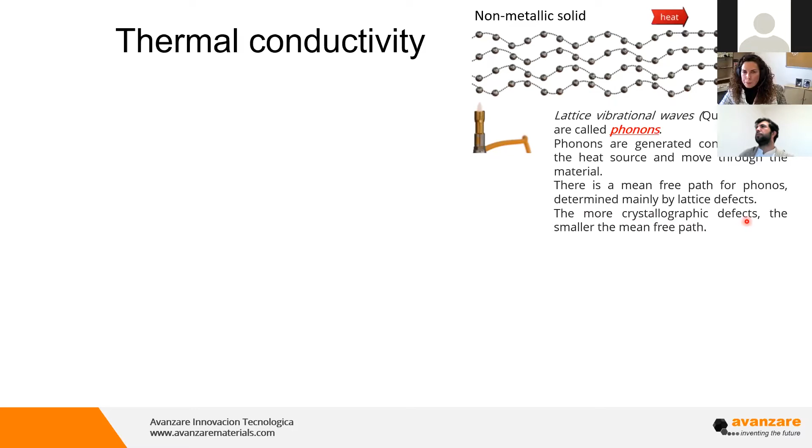When we put graphene in a material, we assume that graphene is conductive. Indeed, the intrinsic thermal conductivity of graphene is about 2000 watts per meter Kelvin, while the polymer matrix usually is about 0.2 watts per meter Kelvin, so the difference is about 10,000 times. So when we put the graphene layers in a matrix, we need to ensure contact between these layers to ensure that phonons move.

When we put these layers in the matrix, we can be in three situations. In this first situation, there is not enough graphene layers to have contact between them and let the electrons or the phonons move.

So there is no electrical or thermal conductivity. In the medium situation, we are in what is usually called the percolation threshold, where electrons can move from one layer to another because of the tunneling effect, in cases where there is not perfect contact between the layers.

So we have electrical, but not thermal or not so much thermal conductivity. In the third case, we have very good contact between the layers of graphene, so the phonons can move easily, and we have both electrical and thermal conductivity. Please keep this feature in mind, because when we talk about increasing thermal conductivity in a composite thanks to graphene incorporation, we will be in this situation.

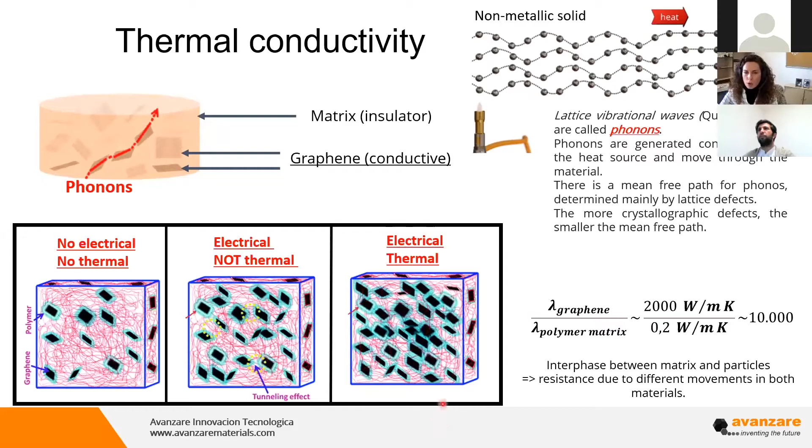Once we understand a bit about how graphene is acting in a composite, I want to explain the family of methods to measure thermal conductivity. There are two big families: steady state techniques and non-steady state techniques.

The non-steady state technique, as the name says, measures thermal conductivity not at equilibrium but during the heating process. This is a quick way to measure thermal conductivity, but there are some effects when the filler has higher conductivity than the matrix, like in the case of graphene, where particle thermal shunting can occur, and it can be a source of error because it translates into an overestimation of the thermal conductivity. Steady state techniques usually record thermal conductivity during equilibrium.

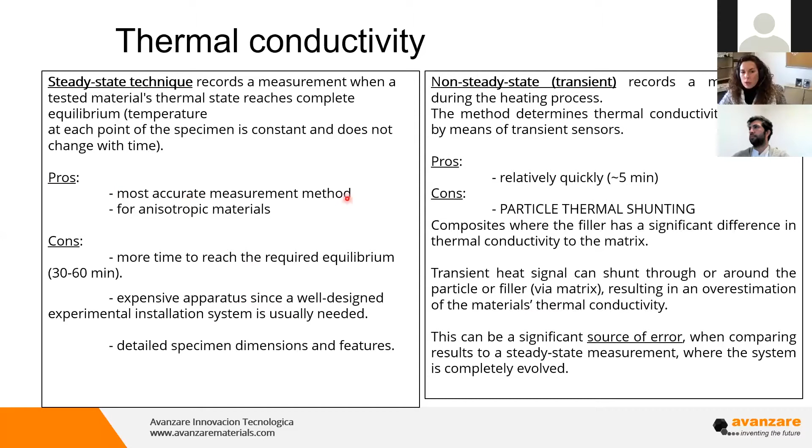For example, a laser, which in most cases is the most used source of energy, makes a pulse, a heat, about one millisecond, to the specimen we can measure, and the temperature is recorded at the back. This is usually the technique used for transient methods. However, today I'm focused on steady state methods because it's most recommended for this kind of material, as I said.

This is the one we have at Avanzare, and I'm showing you in a video how we technically do the measurement. This is with a cooling unit system to keep this plate at cold temperature, about 5 Celsius degrees, while this upper plate is heated at about 45 degrees. Inside we have some thermocouples to determine the voltage and, with that, the temperature.

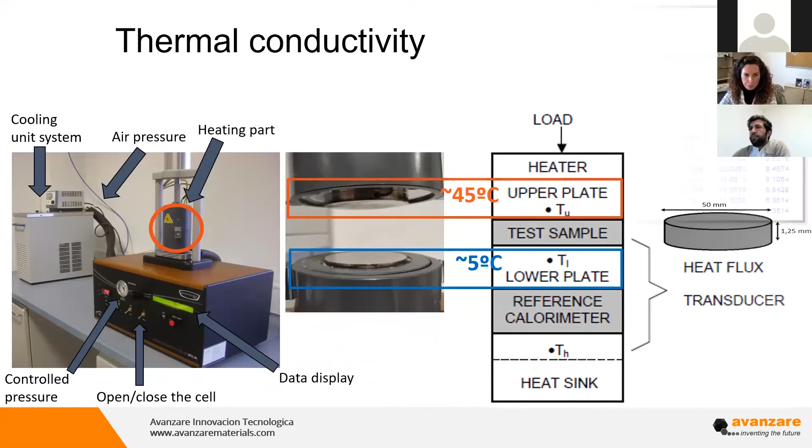So how does this apparatus work? It works with standards made of stainless steel and Vespel, which is a plastic polymer with perfectly known thermal conductivity. With different thickness standards, we can build this calibration curve. We insert our sample results into this calibration curve to determine the resistance, and knowing the thickness, the thermal conductivity.

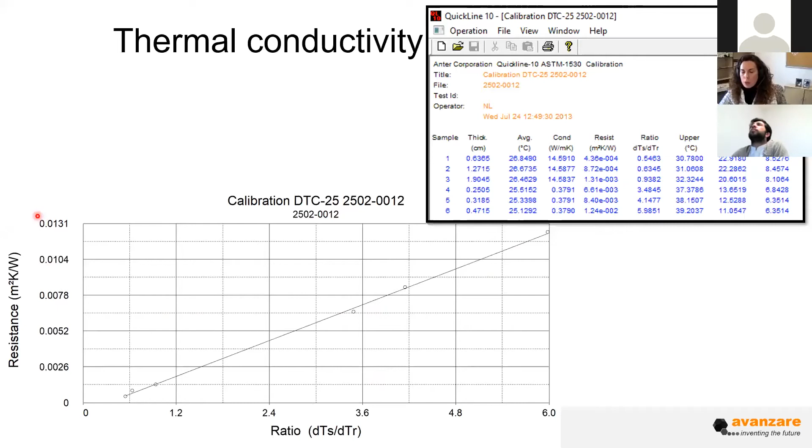The kind of specimens required to determine thermal conductivity by this method is based on standard ASTM E1530. We use this kind of specimen, which has flat and parallel faces of 5 centimeters diameter, and we can provide our customers, if needed, with molds to inject the samples.

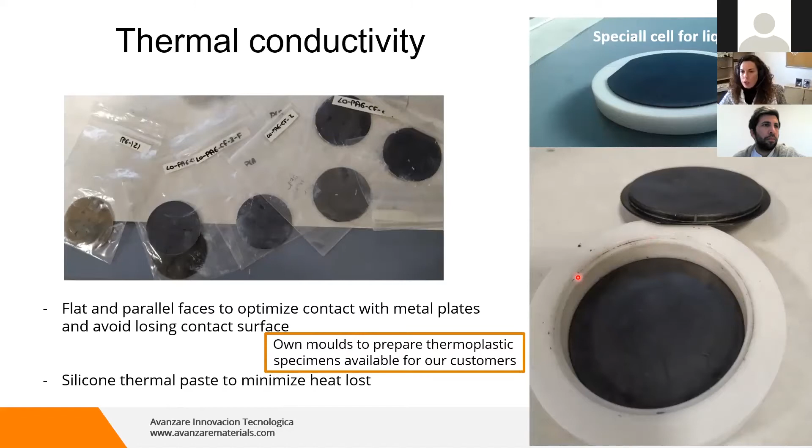In case we are working with fluids, we have this special cell with the same dimensions. We fill the sample here and put it inside. This is the video of how we are measuring.

This is a specimen with flat and parallel faces. We are applying this special silicone paste of high thermal conductivity. It's necessary to apply it directly with your fingers to create this regular surface, as you are going to see now, to avoid any loss of heat from the sample to the upper and lower plate.

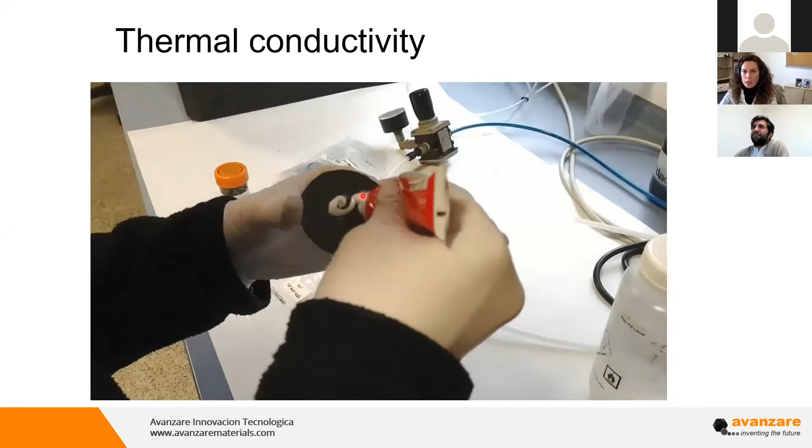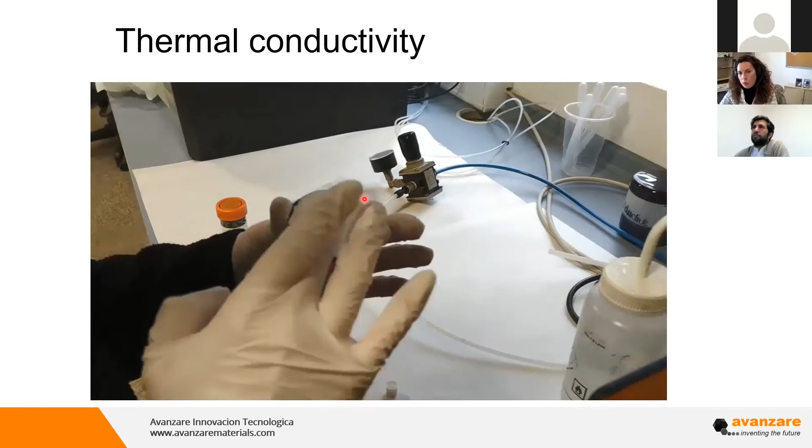So we put this silicone paste on both sides of the sample and insert it into the cell. Once inserted, the cell is perfectly closed to avoid any loss of heat, and after 20-30 minutes it reaches equilibrium, and the voltage and thus the temperature of the upper and lower plate are recorded, as you see here.

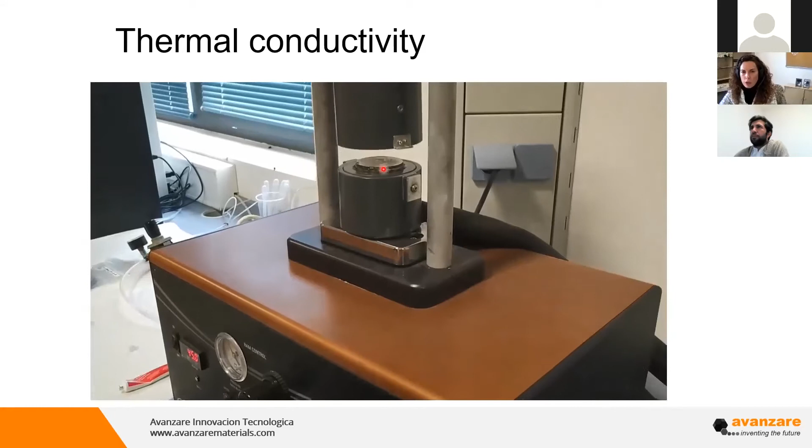So now it's placed. Remember that this is the hot plate, the bottom is the cold plate. We close with some pressure and it's perfectly closed.

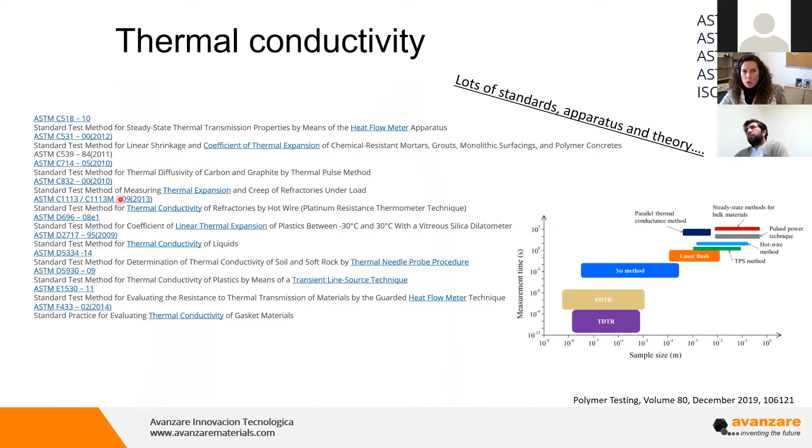Just to finish this section, it's important to understand that there are a lot of standards, a lot of apparatus, a lot of theory, and different comparisons, with some papers discussing differences in the thermal conductivity recorded for the same sample by different methods. So for comparative results, it's necessary that the method be the same, and to take into account some overestimation in the case of transient methods.

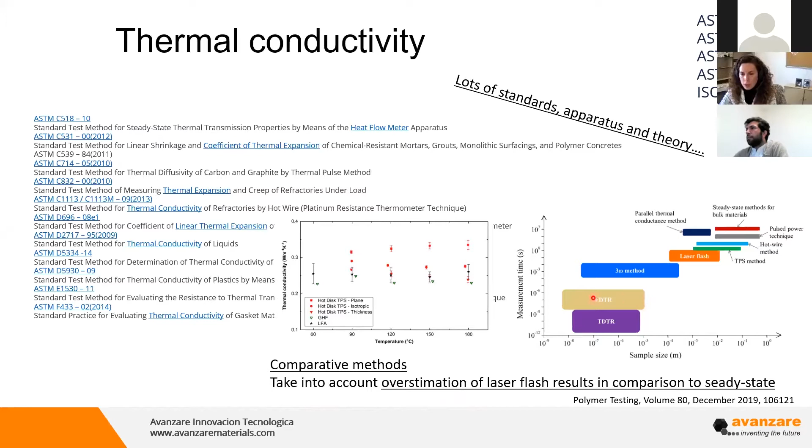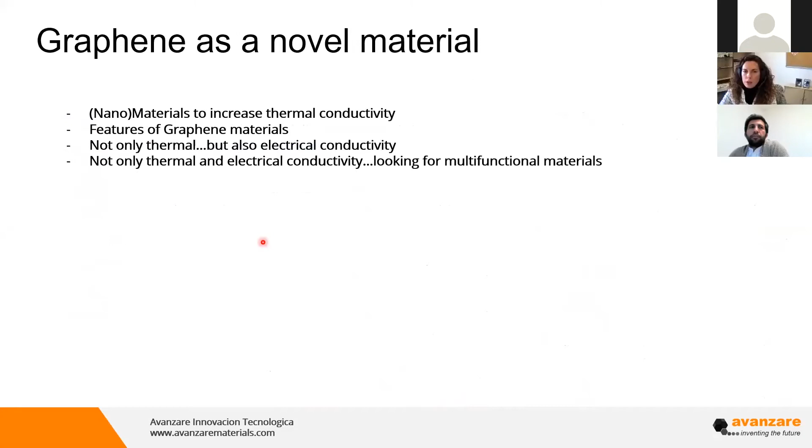So to know how to proceed, I'm talking about what graphene can do for this increase of thermal conductivity. I'm going to explain some features that are important to take into account when we are selecting a material for this. If we compare the intrinsic thermal conductivity of carbon family nanoparticles to others, for example metallic or ceramic, we see that the carbon ones are higher than the others.

But not only this - for example, it's typically assumed and published in different papers that to reach thermal conductivity values of about 1 watt per meter Kelvin with some loads, boron nitride, which is the most efficient ceramic, needs about 50 to 80 volume percent. So it's a high quantity of load.

In case of graphene, not only can we reduce this quantity, but I also want to remark the difference. For example, if we compare graphene density, about 2 grams per milliliter, with metallic nanoparticles, we're talking about 2, 3, even 5 or more times higher. This means that the density of metals makes it so that for the same percentage by weight, the molar fraction is much lower in the case of metallic particles.

This can be graphically observed. If you remember, this is the situation we need to obtain to have thermal conductivity. The graphene is dispersing and occupying much more than metal nanoparticles because of this.

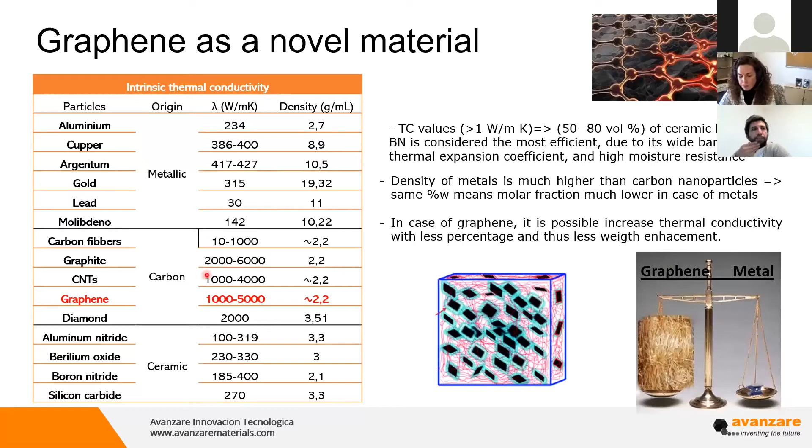So once we've seen this, if we go to modeling and some theory, if we could orient all our layers of graphene in a parallel way to the heat flow, this could be really efficient and the movement of heat should be very high. The thermal conductivity should be very high.

In the other case, if we put it in the other direction, the efficiency in moving the heat is going to be extremely low. What happens in reality is the distribution of nanoparticles inside the matrix is random, and it's needed to go to complex models. Also the results are usually in the middle, both for experimental and for simulation.

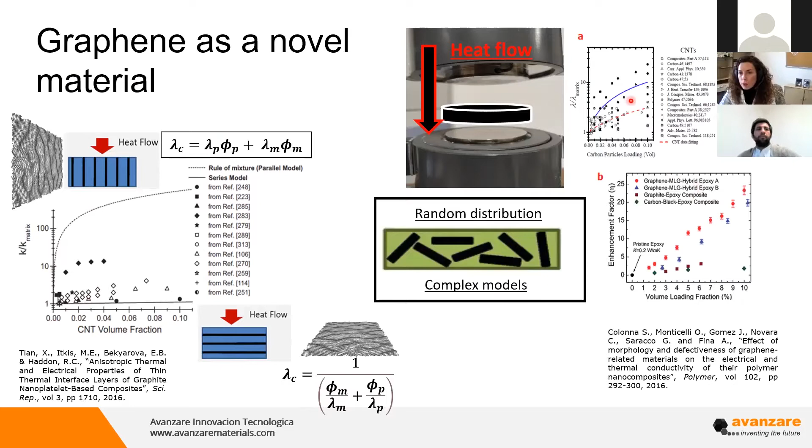I'm going to explain three features of graphene which are really important: the defects in the structures, the lateral size, and the thickness.

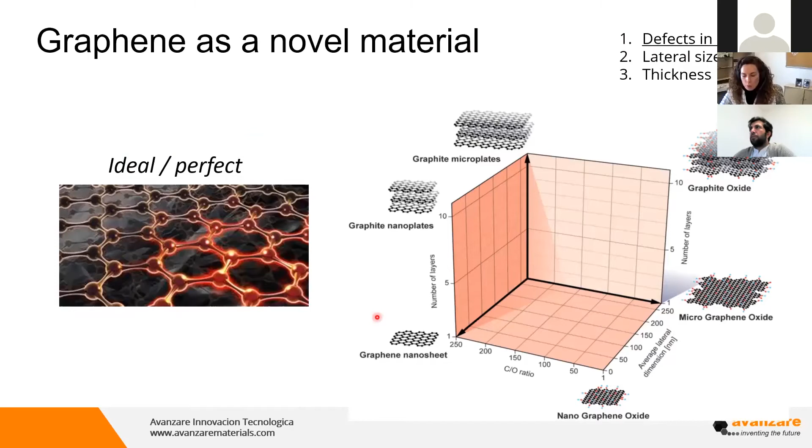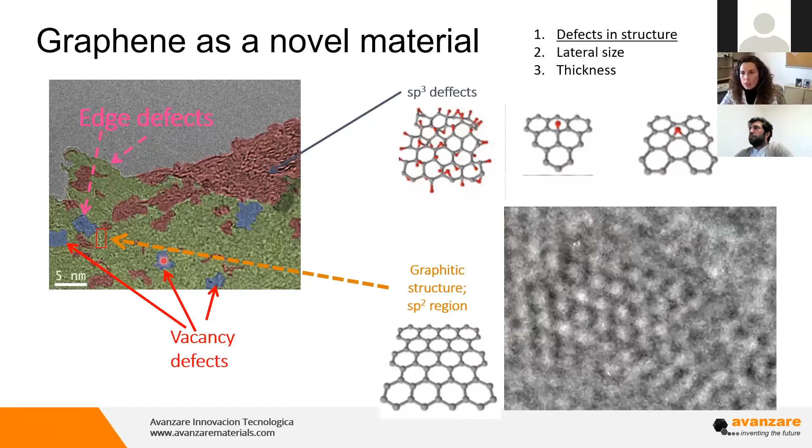Also, we find the end of the layer - so this is edge defect positions. And also there are areas where there are no carbon atoms, these are vacancy defects. So independent of the way, all these defects are affecting the movement of electrons and phonons, and for that decreasing the thermal conductivity - also the electrical, but in this case we are focusing on thermal.

What we do to analyze the quantity of defects of a material is acquire Raman spectroscopy, Raman spectra. Here is myself together with my colleague Boyan, working on the characterization of some graphene. For example, you can see here in the spectra two typical bands associated with the defect positions.

This is called the D band, and the higher the intensity, the more quantity of defects. I need to say there is a lot of theory about this technique, but to have a first approach to this - the more intensity this band has, the more quantity of defects.

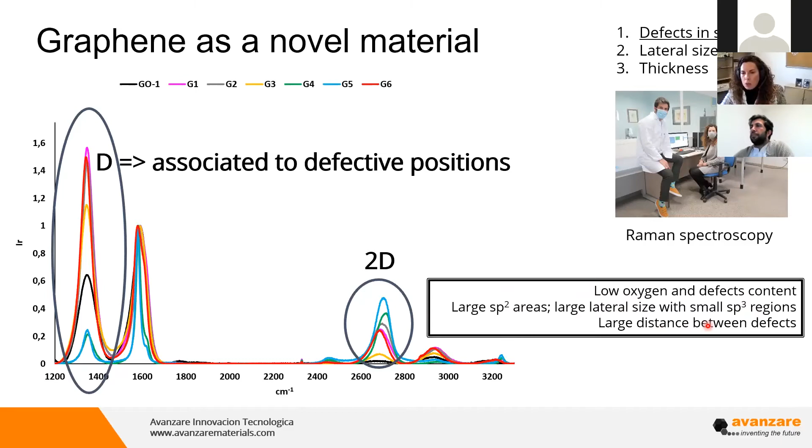Also, the 2D band is important to analyze the quantity and quality of the graphene. But in summary, we need to have graphene with low oxygen, because oxygen is the main defect present linked with carbon. So we need low oxygen and defect content. We need to have as large as possible sp2 areas with small sp3 domains, and a large distance between the defects, to let the electrons and phonons move easily in these high sp2 hybridization parts.

The second feature that I need to highlight is the lateral size of the material - this applies both in modeling and experimental work.

For example, if we compare 10 microns lateral size to 100 microns lateral size in the same kind of material, the difference is 2, even 3 times higher, because with higher lateral size it's easier for phonons to move. In experimental results, we observe that a small platelet of about 2 microns in lateral size barely increases thermal conductivity, while a platelet with about 40 microns in lateral size, as we increase the percentage of weight of this nanoparticle, the thermal conductivity increases significantly, up to 3 watts per meter Kelvin.

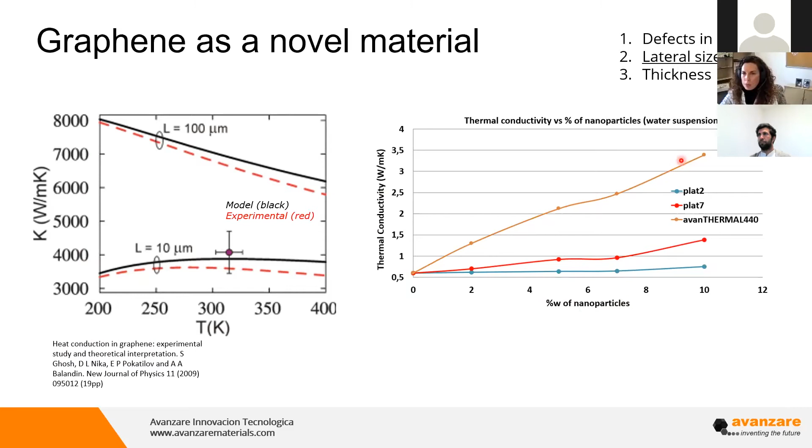Another example to analyze this is a recent paper on natural rubber working with different carbon blacks. We can observe the morphology of the aggregates of these carbon blacks and the thermal conductivity of these samples according to the percentage of volume of the load. If we compare these results with some obtained in natural rubber with materials from Avanzare, we observe a significant increase with a lower quantity of this material.

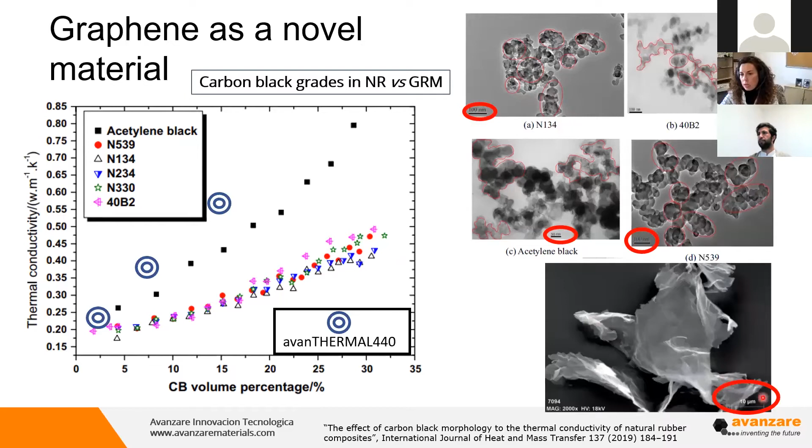Why can we explain this? We can explain this because this kind of material is about 40 microns in lateral size, while this one is less than 50 nanometers, and even the aggregates have a smaller lateral size. So this is like comparing a meter to a kilometer, it's the same range difference from nanometer to micrometer.

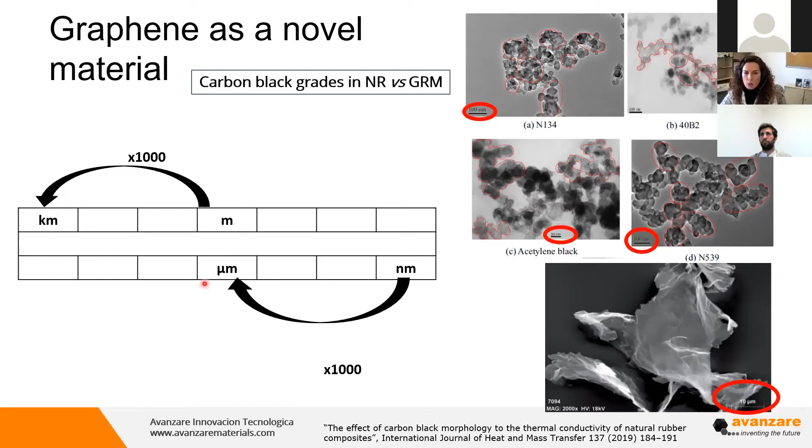The third important aspect to take into account is the thickness of the material. If we take into account that graphite is also a good candidate to increase thermal conductivity, because it also has an intrinsic high value of thermal conductivity, we need to understand that graphite is composed of millions of layers of graphene. So, of course, the contribution in the XY plane is high, about 2000, the same, but there also exists an important contribution in the Z axis, which is about 6 watts per meter Kelvin.

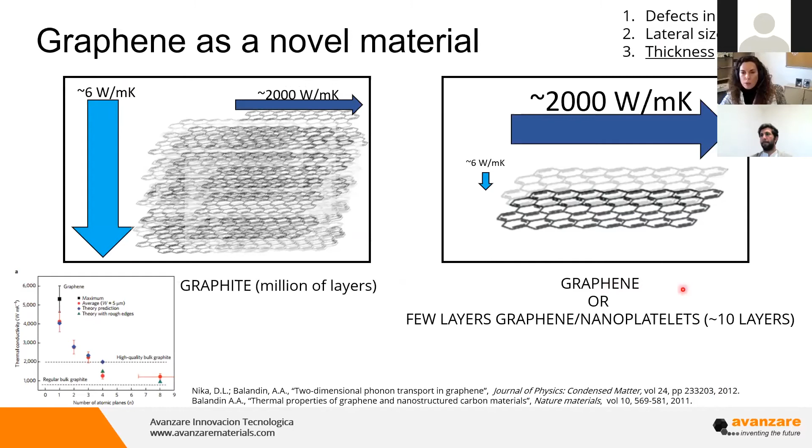So in the case of graphene, this is reduced. Especially if we compare with graphene, the contribution in the XY plane is much higher than in the Z axis. Besides, in the case of graphene, there is a greater number of particles because it's an exfoliated material in comparison to graphite. So once we understand these three main features, we are going to see some effects.

Apart from thermal conductivity, I'm going to explain that electrical conductivity, as you've surely read and observed in some results, is increasing a lot. For example, in a PEEK matrix, we are achieving 1 Siemens per meter in these composites, while the thermal conductivity is more than 0.5 watts per meter Kelvin. This is due to the tunneling effect and the movement of electrons along the matrix.

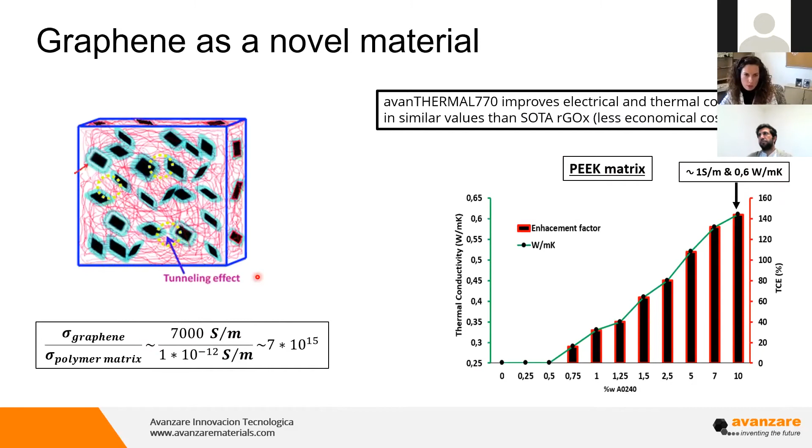What happens when we want thermal conductive composites but not electrical conductors, electrical insulators instead? In this case, what we are doing is achieving it by mixing our graphene nanomaterials with ceramic ones. As you've seen before, ceramic materials also have high thermal conductivity and at the same time are electrical insulators. For example, boron nitride is about 10 to minus 8 Siemens per meter. So what we can do is allow phonons to move, but put these nanoparticles, in this case the ceramic nanoparticles, in the middle to prevent electrons from moving and having high electrical conductivity.

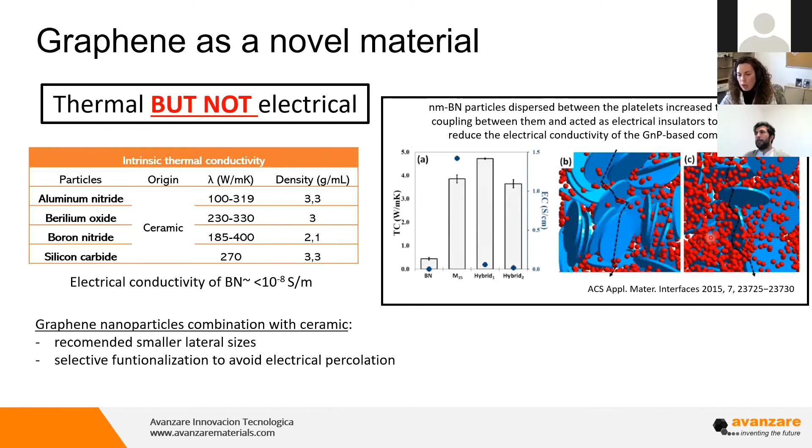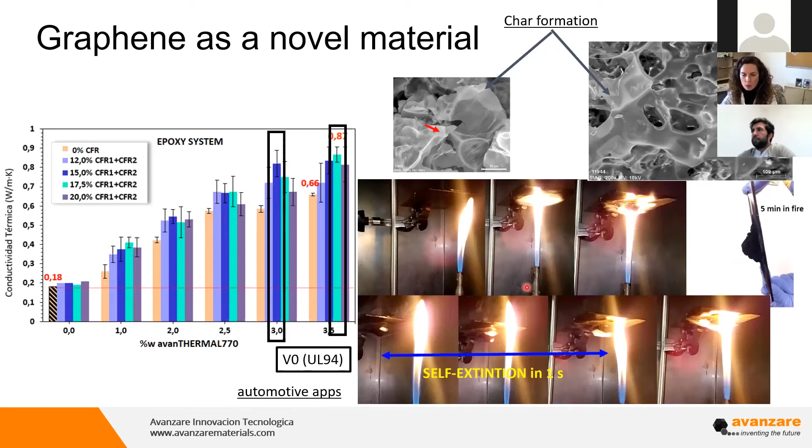Now we are going to explain a bit about how to produce these high thermal conductivity samples and some real applications that can be obtained, which are being prepared in different materials, such as thermoplastic, thermoset, rubber, or fluids.

When we need to prepare these high thermal conductivity samples, we need to remember that if we have chosen a large lateral size graphene material, one thing we should not do when processing with our polymer or matrix is break the lateral size. Because, for example, if we put this in a dispersion mediated by balls, the high impact will break, damage this plane and cut it. So what we have at the end is not this initial dimension, but a smaller one. So the percolation will require a much higher dose than expected. It's necessary to avoid breaking the lateral dimension.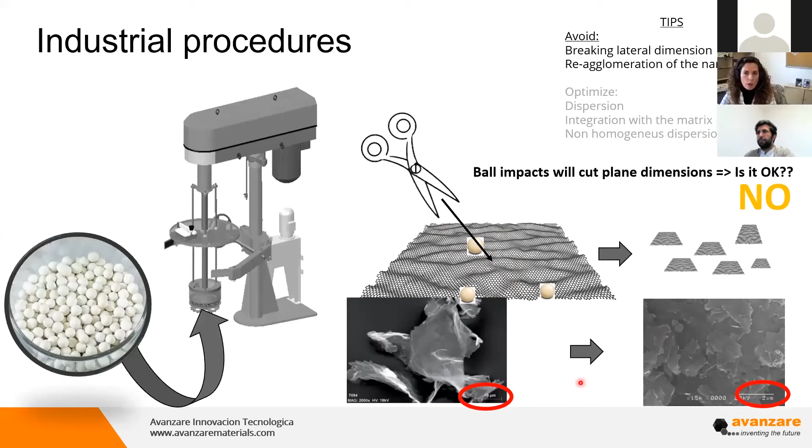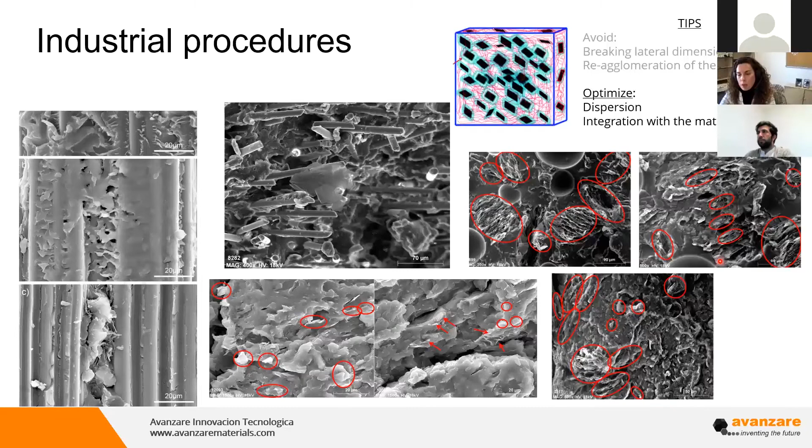It's also necessary to avoid reagglomeration. For example, in these same micrographs we can observe that in the matrix some parts are filled with reagglomerated graphene, but others are empty. So if we want a homogeneous material, this surely would not be a good idea. Another aspect to consider is having a good interface with the matrix, because the better the interface, the lower the resistance due to it. So dispersion and integration with the matrix are really important to take into account.

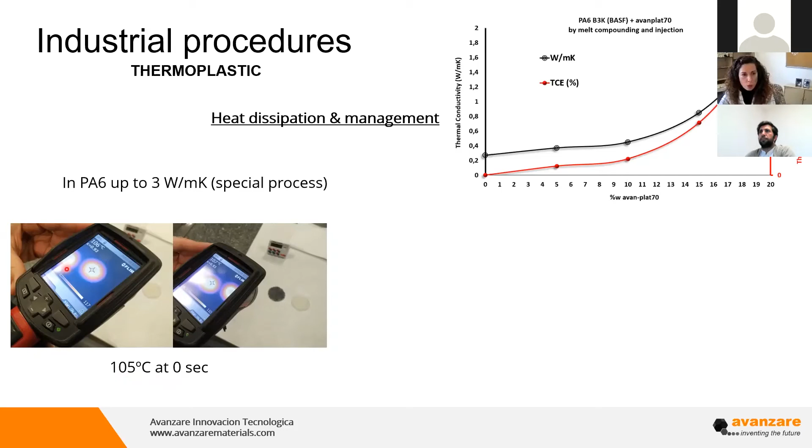Some applications we can observe in different areas: for example, this is thermoplastic. What we see in the image is two materials, neat polyamide 6 and polyamide 6 with graphene. To see graphically how this works for heat dissipation and management, we heat both at the same temperature. At the initial time, it's up to 100 Celsius degrees. We record the temperature with an infrared camera, and after 2 minutes, the neat polyamide remains at about 60 Celsius degrees, while the one reinforced with graphene is 20 Celsius degrees below.

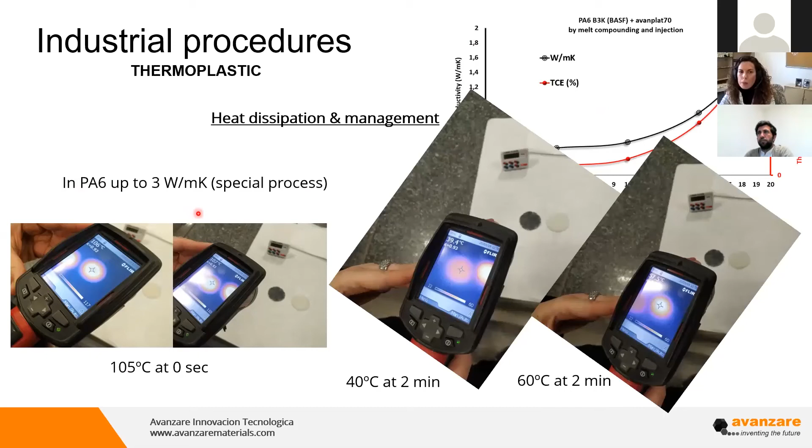This kind of application is useful for accelerated cooling processes of materials. This is because the thermal conductivity of polyamide is near 0.2 watts per meter Kelvin, and when we add these graphene materials, in some cases, depending on the process and the kind of polyamide, we go up to 3 watts per meter Kelvin.

So what we can do with these kinds of materials is prepare polymer heat exchangers, as for example these pipes, cooling hoses, and radiator tanks. The heat exchanged with the fluid is greater and happens in a quicker way.

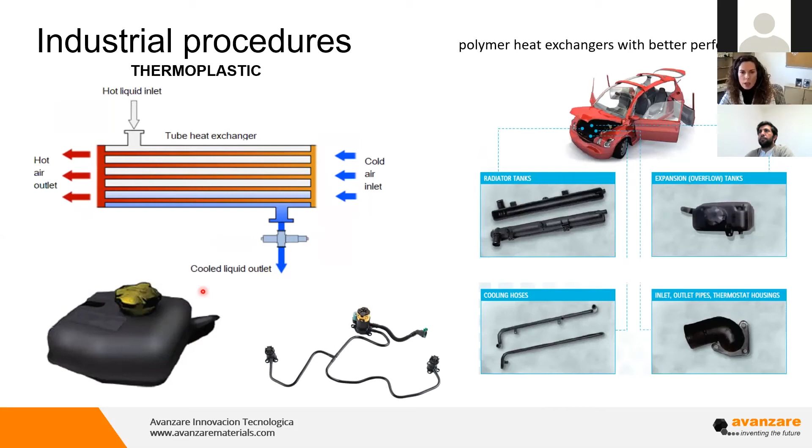What we do in these cases, if the customer needs it, is prepare a master batch with a high quantity of our material. This master batch can reach 3 or 4 watts per meter Kelvin, depending on the processing and the starting polymer, and of course with high electrical conductivity.

We can provide this master batch because in some applications such high thermal conductivity is not required, but one or more watts per meter Kelvin can be enough. So the user can employ this master batch in their process to prepare a final material.

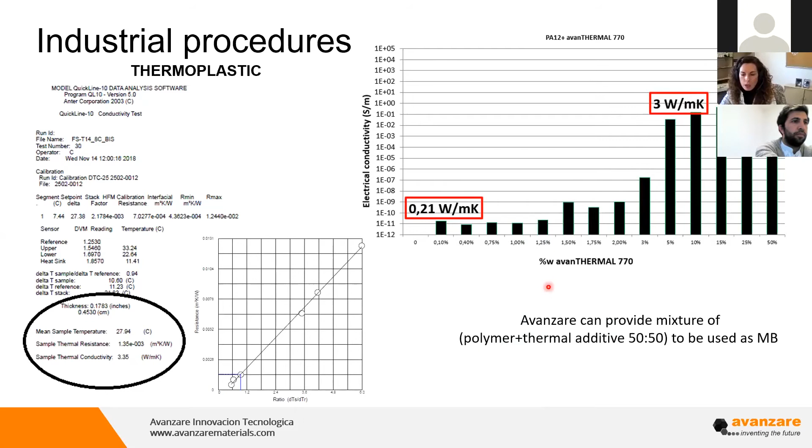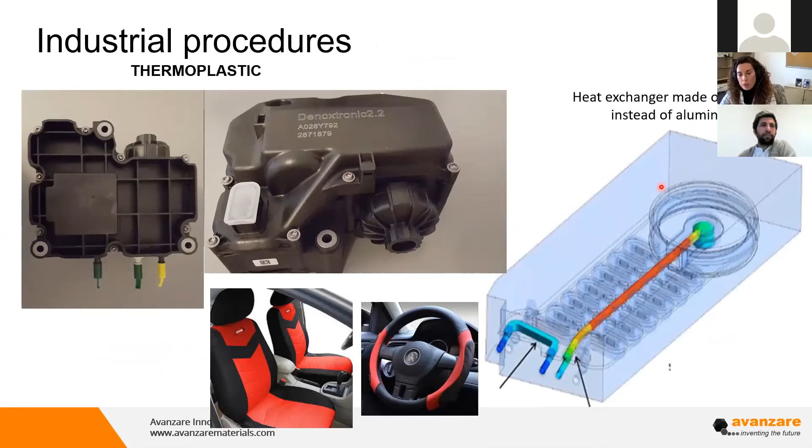In the case of thermoset, we've seen before the V0 behavior of the polymer with glass fiber, fire retardants, and graphene materials, with these self-extinction features valid not only for automotive but also for building applications, for example to manage heat in houses, passive houses, and similar buildings.

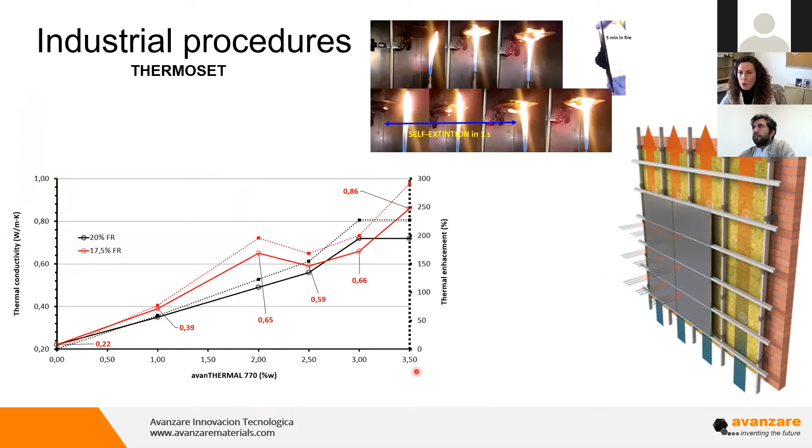In the case of rubber, we've seen before the increase in thermal conductivity. These applications are especially for silent blocks used as anti-vibrational components in cars and the automotive industry, in different parts of the car, where what we do is increase heat dissipation.

These components usually work at higher frequencies, so they undergo important fatigue and accumulate a lot of heat. If we reduce the working temperature of these materials, we reduce the fatigue and increase their life. It's important to highlight the results we can observe here.

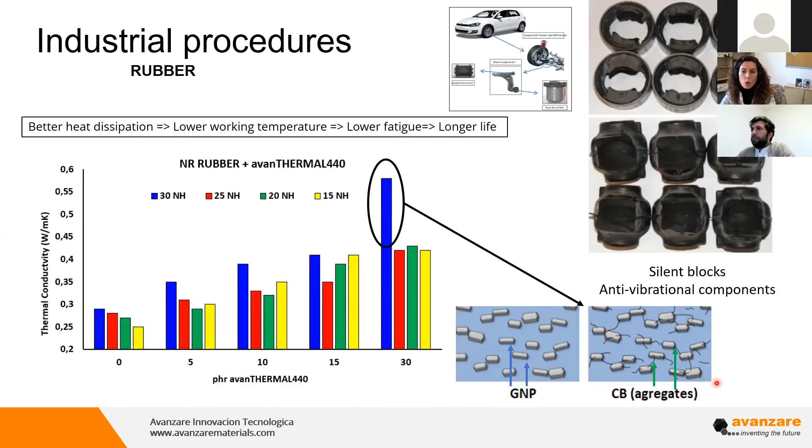This is the industrial formulation with different quantities of carbon black and different phr of our avanTHERMAL440 conductive additive. In this case, it's important to highlight what happens when we significantly increase thermal conductivity: we are creating a very cohesive network with graphene nanoplatelets and the aggregates of carbon black. So it's really efficient at moving heat from one part to another.

Apart from solids, thermoplastic resins, as we have already seen, there are some applications in liquid. For example, this is in water for cooling circuits. We have been working in different projects to have a nanofluid without affecting as much as possible the rheological performance. In this case, it's water-based, because in this kind of circuit, it's important that the viscosity is not enhanced.

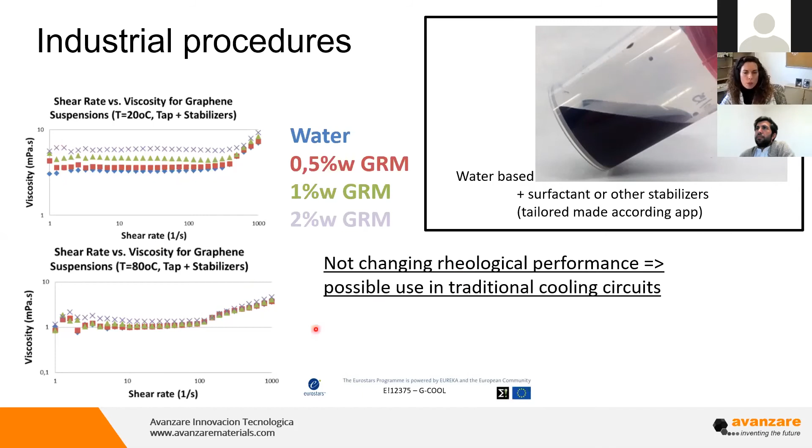As we can observe here, the suspensions are really near to the water performance, not increasing the viscosity so much, less than 10 centipoises. And what we are doing is working in these traditional cooling circuits.

We have selected a smaller, in this case, graphene related material, because we need to take into account that these parts are really small, about 1 millimeter. So with this application, what I mean is that we can adapt our materials to the applications to have this optimized performance.

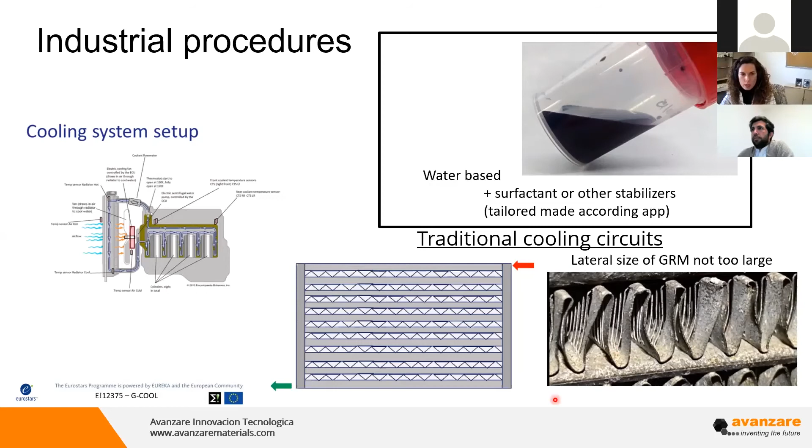What we can observe is an efficient comparison to neat water, more than 25,000 joules per second in the exchange of energy. So this can be applied in thermal management, both in buildings and in cooling systems for vehicles, in other ways.

If we compare the performance of water, which is the blue line, with the red one, we are decreasing the temperature of the coolant at the exit of the radiator. In this case, it was recorded in a car radiator at about 10 Celsius degrees, which we can think is not too much, but it's really efficient.

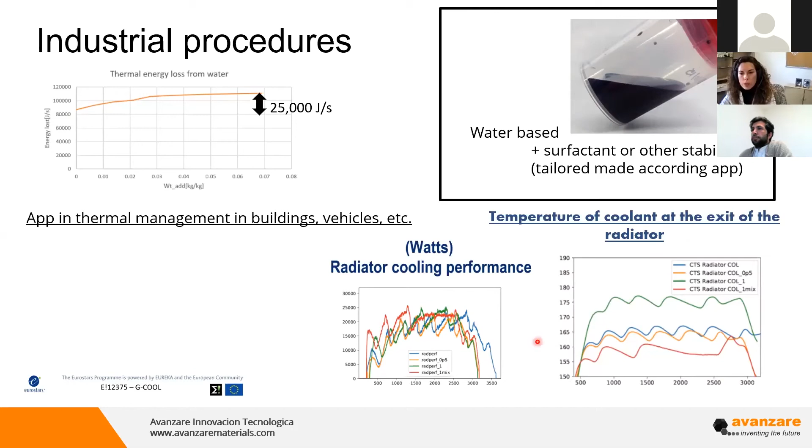So here it's the watts that we are increasing in dissipation, and it's important to understand that we are increasing the performance of this radiator so much.

So with this, I'm finishing some applications that have been some examples in different polymers, and I'm giving two comments that we and other partners have received working with these materials.

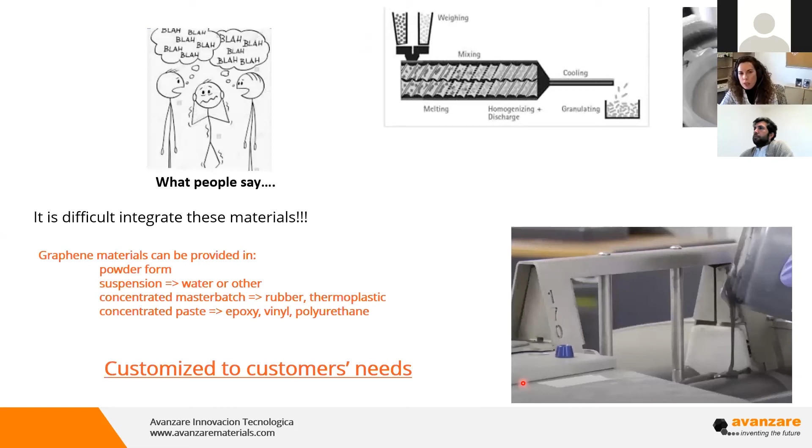So when we propose graphene to a company or in some project, sometimes we hear, okay, but these materials are difficult to integrate. At Avanzare, we say no, these materials are not difficult to integrate, it's just necessary to have knowledge and experience. So we are glad to say that we have years of experience working with these materials.

As I said in some examples, we are not just providing the powder form material, we are providing a suspension, a concentrated masterbatch in different matrices, rubber, thermoplastic, a concentrated paste in case of a resin or an epoxy, polyurethane. So in this way, we customize to the needs of our customers, and also we are avoiding other problems with health or with environmental exposure, and make it easier for the final user, so they can optimize their preparation of a final product.

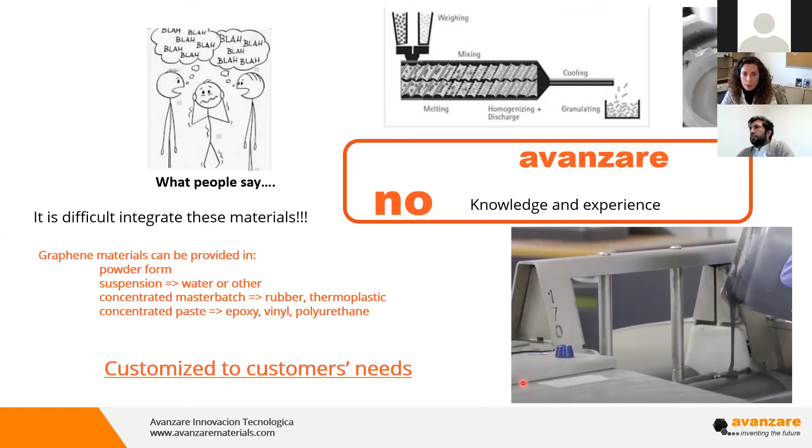The other aspect that is usually commented is that these materials are too expensive. But if we take into account that Avanzare is a company that has devoted a large amount of effort to make an efficient industrial scale-up of these materials, we need to highlight that some of them have a very competitive price, because we are talking about preparing even tons of this. So these materials are not so expensive, they can be in the range of a carbon black, of a conductive carbon black.

Indeed, if we take into account that usually the dosage we are using is smaller than other typically employed industry materials, we are talking about cost-effective materials. And also, if we take into account that we can obtain other functionalities.

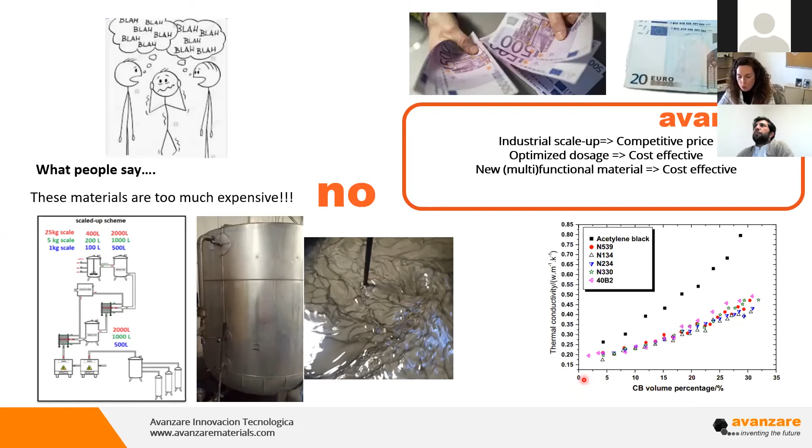So this is just an example that we can provide from Avanzare: functional and coherent applications for the market, always thinking of cost-effective materials which can be industrially produced.